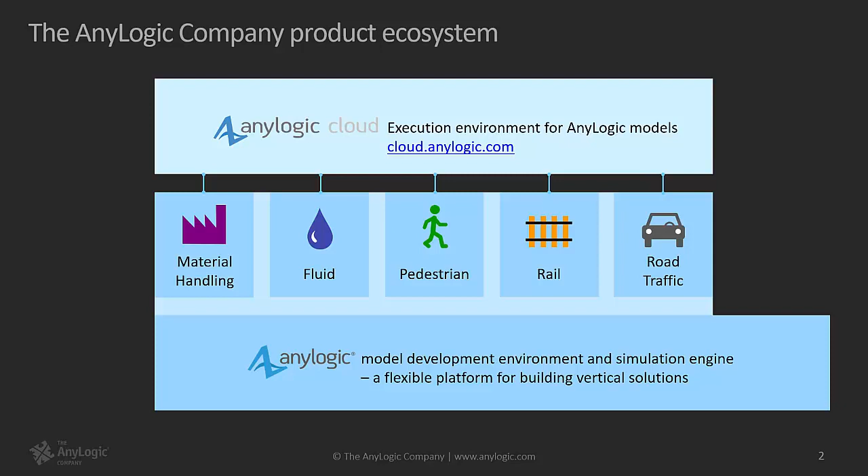We also have a cloud-based execution environment for AnyLogic models, and you can basically go to cloud.anylogic.com to see what it looks like. We also have a separate product which is called anyLogistix, and anyLogistix combines the power of linear optimization with simulation to provide the platform for supply chain design.

And also, as our strategic activity, AnyLogic is currently the leading simulation platform for applied artificial intelligence. With AnyLogic Cloud API, ability to export AnyLogic models to popular AI development environments such as Microsoft Bonsai or PathMind, and also with AnyLogic Python connectivity, we enable AI developers to train and test learning agents in simulated environments.

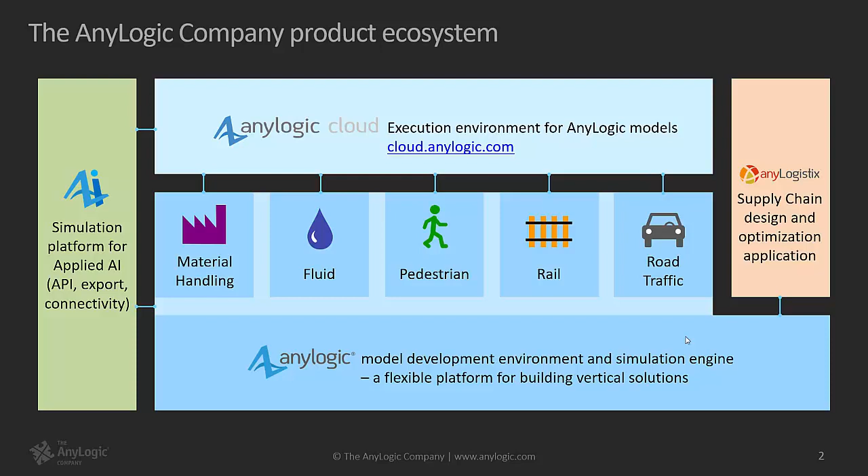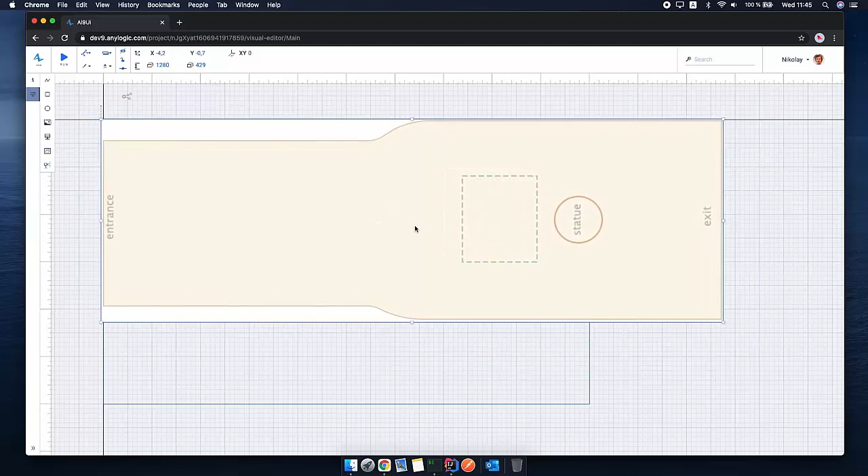Okay, so we are ready to create a simple pedestrian model. I will start with creating the layout. Suppose the layout exists in the form of a JPEG image. So I just select the image shape on the palette and choose the image. Also, I need to align it and make it a little bit smaller. And I will be drawing the walls on top of that image, so that's why I will lock it.

Okay, and probably we are ready to start drawing a wall. In AnyLogic 9 we worked a lot on making the graphical editor very efficient. This wall contains straight as well as curved segments. And as you draw you can create both and edit previously created points. There also are guidelines that should help you to align wall segments.

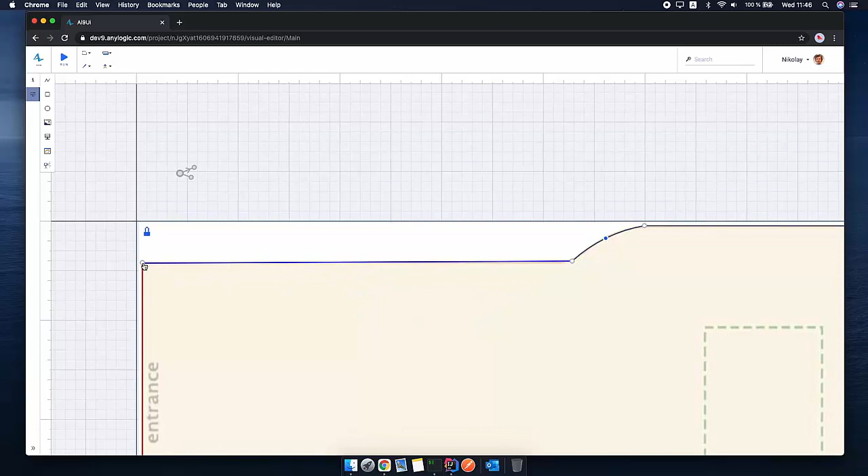And by the way, the facility we are about to model is a museum hall with just one art object, an installation. And this will be our only installation today. So some visitors will come in and stop by to see the installation, and others will skip it and proceed directly to the exit. Let's say the purpose of this model is to understand the density of the visitors. These days it might be particularly important, you know.

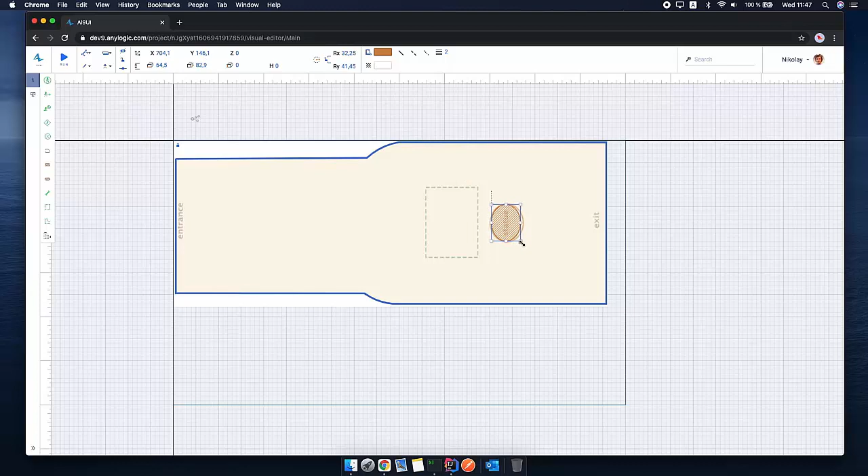So we obviously can change the appearance of the wall, its width and its color. And now I'll model the installation by the shaded area, which will be treated as an obstacle. Let me draw it. And here we are. We are ready to implement the logic.

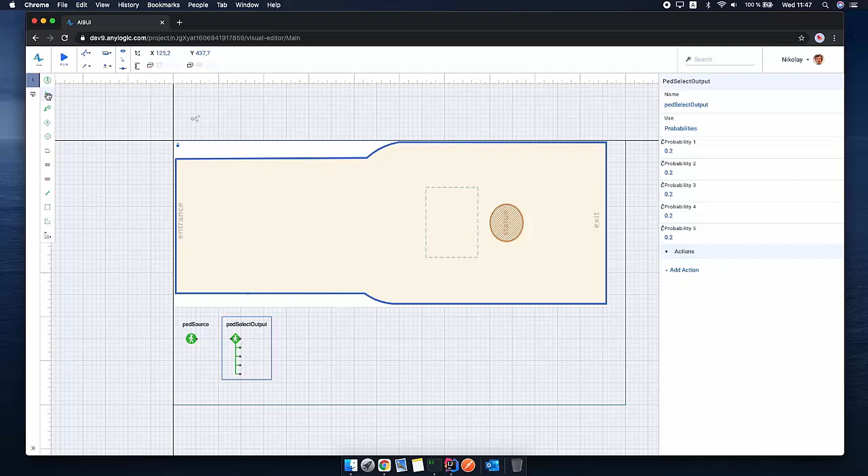Thank you, Yaroslav. In AnyLogic, the layout and the logic of the model are defined separately. And now I would like to start defining the logic of pedestrian flow. It starts with a PedSource block, continues with a PedSelectOutput object. Then we will have a PedWait block to model watching the installation. And then it will be a PedGoTo block. And the flowchart will finish with PedSink. Now we are connecting these blocks. Okay.

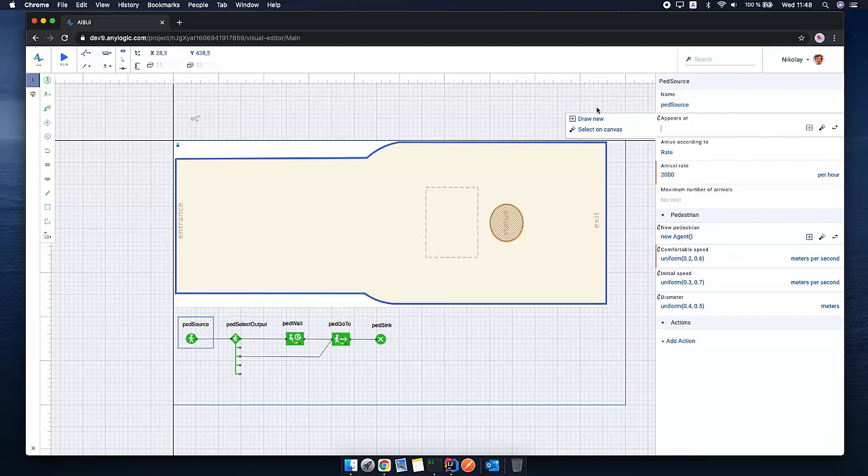Okay, here we are. I just clicked on this PedSource block and its properties appeared on the right. I will change the arrival rate and the comfortable speed of museum visitors. Also, I need to define where my visitors will appear. I will choose to draw a new target line right here.

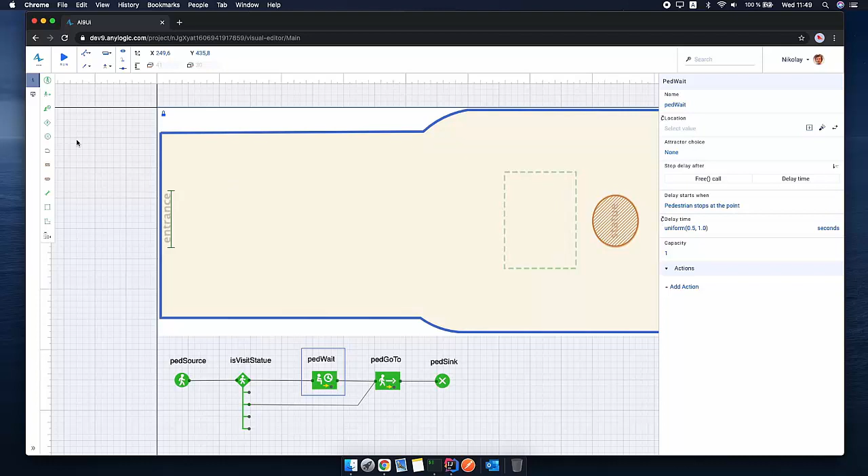You remember, not everybody wants to see the installation. So I will split the flow by defining two probabilities. 80% will watch it and 20% will proceed to the exit. And I will just give some meaningful name to this SelectOutput block. For those who watch the installation, I will define a special area of rectangular form and specify it in the location of the PedWait block.

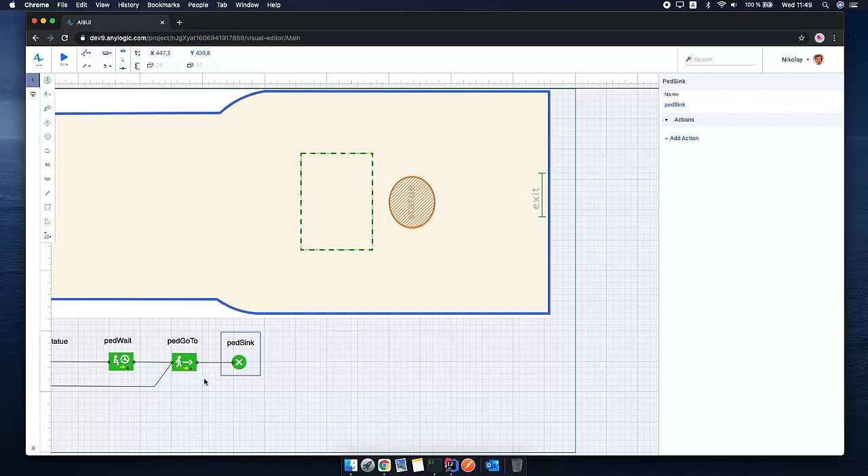Finally, we need to define the exit location and provide it to the PedGoTo block. Also, we will assume that the time needed to enjoy the installation is uniformly distributed between 30 seconds and 2 minutes. Okay, some final checks and we are ready to run the model.

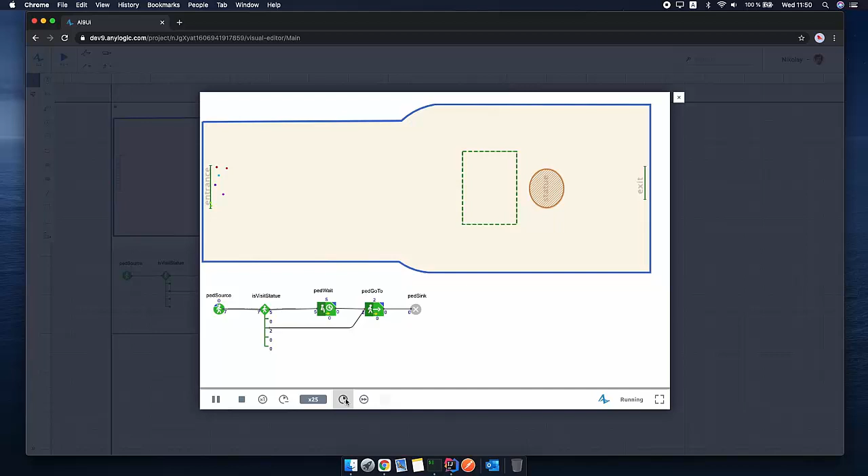So probably we are ready to start, and as I'm pressing the run button, the model gets compiled and launched on the server, and its animation will be fed to my browser. Okay, let's speed up the model a little bit. So here we see the visitors running into the museum hall. Some stop and some run to the exit directly.

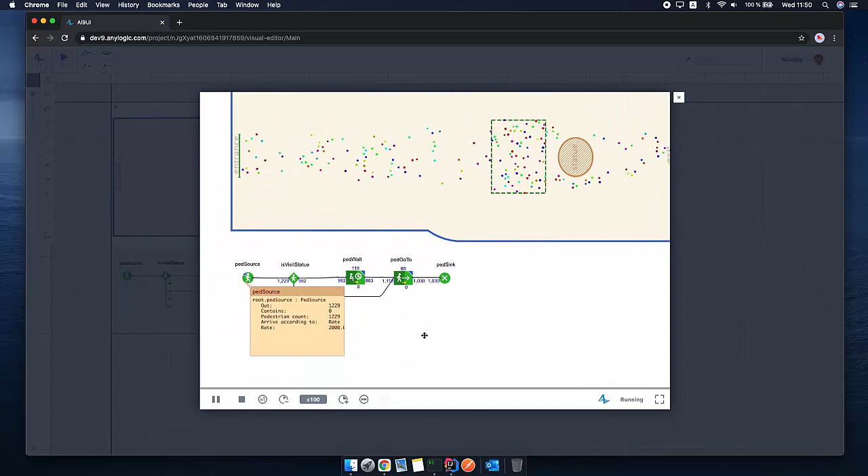This vector animation is fully interactive. You can click objects and inspect their activity. Also, you can see some statistics inside those blocks. Or, for example, you can easily speed up the model. So I guess you understand the main idea. Okay, we are ready to go back to the model editor.

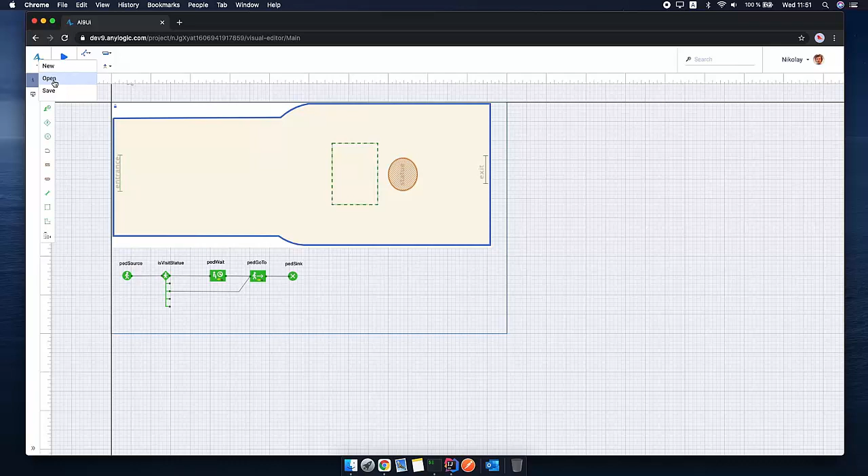And now we are done with this model, and in the remaining time we will show you one of the completely new features, which is called zoom out view. To do it, we need to open a more complex model. This model is hierarchical with multiple objects or agents. So to efficiently navigate and manage such models, it's essential to have a good view of objects' relationships. So here's what AnyLogic 9 actually does.

AnyLogic 9 analyzes the model structure and builds the zoom out view. Now you can select an object and its relationships with the other objects are highlighted. So if you decide to dive inside an object, you can simply click on it. And just like in Google Maps, if you continue zooming out, you get to the Earth view. I guess that's it with the demo, and let's go back to the slides.

Thank you, Yaroslav and Nikolay. That was a wonderful demo. And now let's go through some features of AnyLogic 9 that we did not show you during that MVP preview.

First, AnyLogic 9 will support multiple scripting languages. In addition to Java, the modelers will be able to choose and use Python. As Python is getting more and more popular these days because of its ease of use and higher level of abstraction, and also because it is becoming a sort of standard for data scientists and AI developers, we decided to add a Python option to AnyLogic.

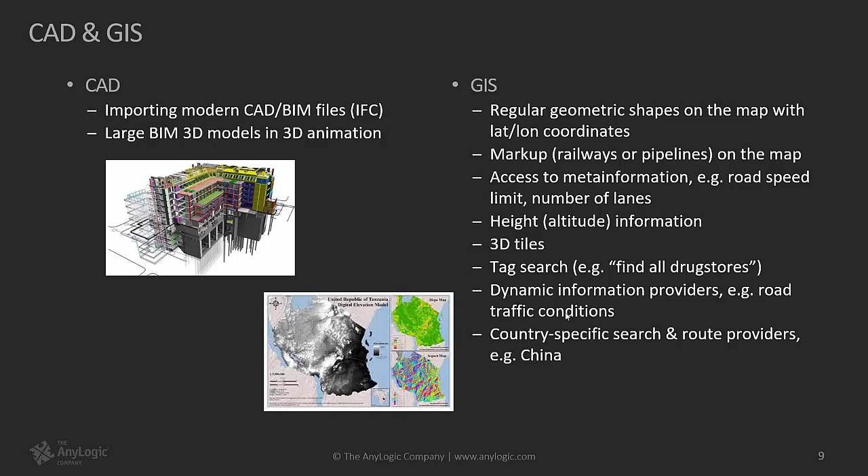AnyLogic is standard for simulation in many global organizations, and models are being developed by teams as well as by individual modelers. In AnyLogic 9, we're answering the demand for teamwork support by enabling integration with version control software such as Git, and we will enable branching, merge of conflicting files, etc.

And now, probably the most interesting part, AnyLogic 9 installation options. This is where 9 is significantly different to 8 and actually very much different to any other software existing today. First, for those guys who would like to stay within the classical paradigm, everything should be installed and work in my laptop, don't worry. That option will still be available with the same set of operating systems supported.

But what really opens up more possibilities is the server installation of AnyLogic 9. In this setup, the IDE, Integrated Development Environment backend, and the model execution environment, functionally same as the AnyLogic cloud, is installed on a server, a cluster, or a private cloud. This immediately enables what we call front-end only users working from the browser, which, by the way, complies with the most strict security requirement like no data on the client machine.

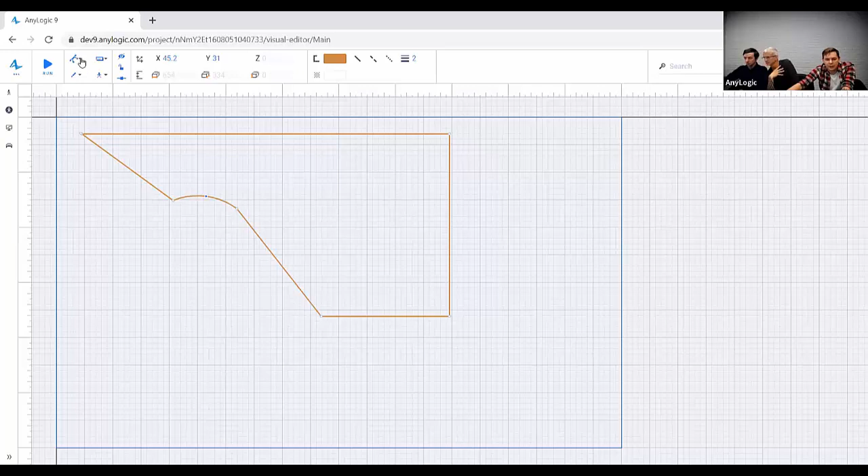It's a pretty simple idea, and if I don't want to pay enough attention to what element I actually wanted to create, I can use some universal polyline element. All right. Do you have any questions, probably?

Thanks, Yaroslav. Okay, will there eventually be more libraries on the cloud version? Okay. Because the development of the libraries is a continuous flow. So in AnyLogic 8 we have several libraries covering different verticals, and in AnyLogic 9 we take all these libraries to AnyLogic 9 and continue the development. And if we decide to make new libraries, cover new directions of simulation modeling, we will, of course, start.

Yeah. So guys, please don't worry. The reason you have only seen one library in this MVP is just because we're testing some UI features, and we implemented the kind of minimum set that would allow us and the selected users to play a little bit with the UI and give us the feedback. But when AnyLogic 9 is released, every vertical that is supported by every library will certainly be available in AnyLogic 9 as well. So there will be no drop in functionality, only improvements and only growth.